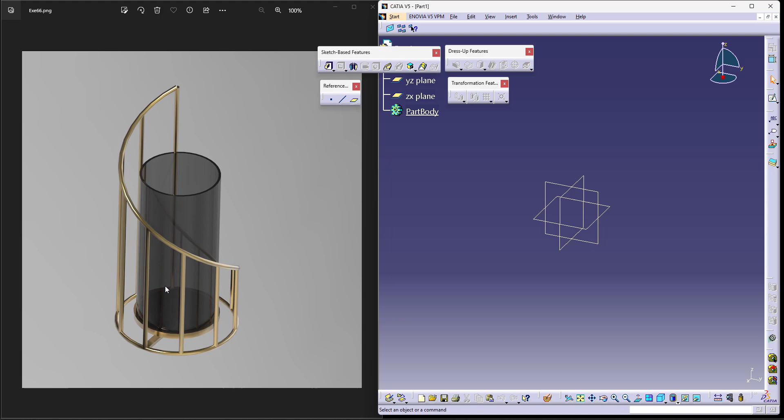So to begin with, let's start with our part design. We already have part. In this one, I'd like to start with the base, make the support first, and then make these, and then join them together. Beginning with that, let us try to take the top view.

Since the base is a circle, I'd like to start with a circle, assuming the dimensions. We have actually measured the dimensions, so I'm just taking it as per those. You can follow, or you can also change the dimensions as per your convenience.

This is a complete cylindrical base. So I need to take a plane, so I can simply start using my rib command. And while taking a plane, I'll make it normal to the curve.

I have a curve, but there is one problem: I don't have a point. So I'd like to create a point by using create a point. Here on the curve, select the curve. You can either give the ratio of the length, or you can actually give it as 1, and say OK.

Now on this, you can actually unhide the point as well, there's no problem. On this, we'll make the sketch. I'm again taking the sketch. This is actually my reference, that is the reason I have unhidden the point, and then I'd be making this circle.

Now the circle is actually towards the bottom. It's not exactly in line with this, because the curve whichever is taken is actually varying. So the base is standing in line with the groove where the base can sit on.

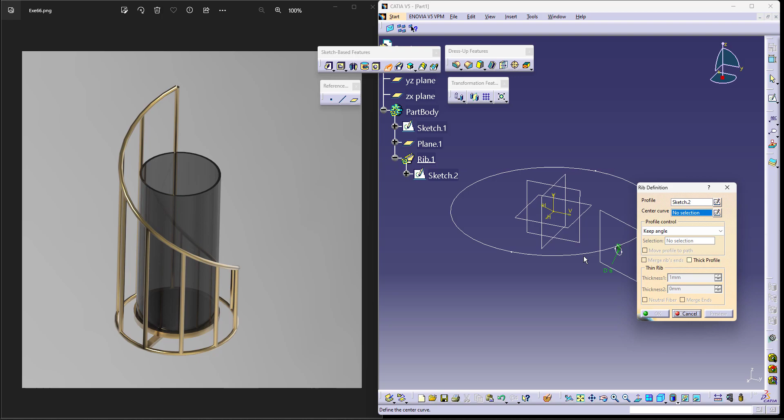Exit. To add material to these types of profiles, you can use rib. Since a uniform cross section is following the complete path, you can directly select this, select the center curve, and say OK. It normally adds the profile.

Now, coming to the base, there is a rectangular portion here and then a circular portion. So let me try to make that rectangular portion as well, considering the right view at the moment.

Now I'd like to make the rectangular portion here, exactly located at the center, which is at a distance of 1 from this side, and 5 from this side, and 4.

Okay, maybe take 5. I need to maintain it symmetrically, that's why I'm trying to take the dimensions. I have not personally measured the dimensions.

Exit the workbench. Now I'd like to add this. I'll be using a pad. To add it, you can add it up to next and onto the other side too.

Now, between this circle and the rectangular bar, there is a very small circle which actually joins these two. So I'd like to take that circle as well, of the same size as the rectangle, considering I'll just coincide the center.

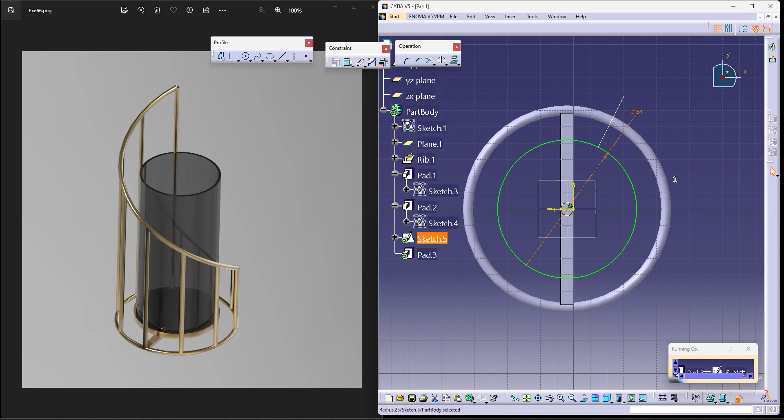Let me take it as 84. This is your circle. Once I exit, I'll add it up to around 6 mm and let it go.

This is your pad. Now, since this is supposed to be hollow, I'd like to use shell and give it up to around 2 mm.

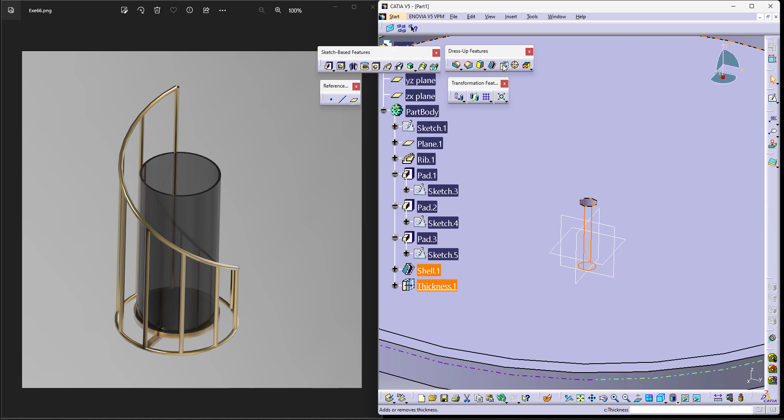But the material also shells here, so I can just add extra material to not shell it there and leave it probably a little bit more, and then leave it this way.

You can also exclude the surfaces in shell, but there is an issue here. It might not create the exclusion perfectly.

Now, the main thing is to create this shape. So let us begin making the shape. I'd like to use my top plane first.

I have 8 of these bars, so I'm going to divide them properly and then work on it. So this is my reference, this is my 0, 0.

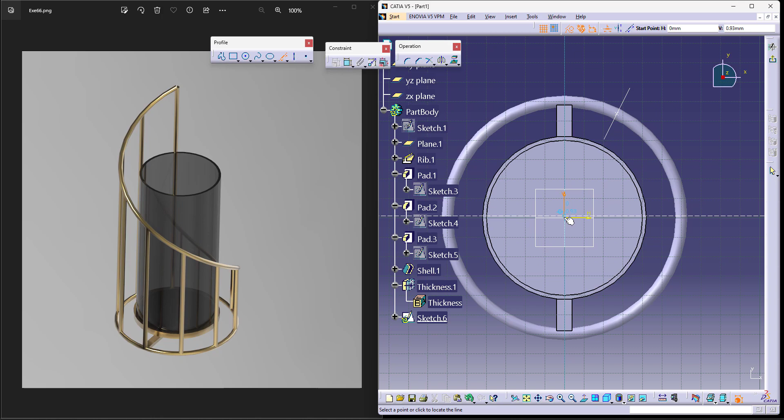Now, on the same plane, I'd like to create a point. The point will be in line with the center circle.

Actually, I'll just unhide the sketch and use this as my reference. It's a little more easier for me to do so.

And then I'd like to create a point exactly at the intersection using my 3D point. This is your 3D point.

Let me hide these so it won't create an issue later. This is my 3D point.

Similarly, I'd like to use a pattern of this, because we require 8 of them.

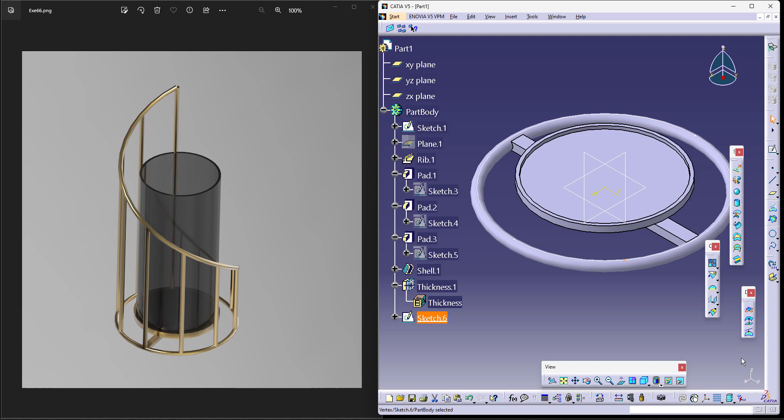So under start in mechanical design, you have wireframe and surface design. Over here, you can actually create a pattern to the points. We can actually use rotation to do so.

I have already selected the sketch. My axis is Z axis. You can see it begins moving it, and since I want it, I'll just give it as such.

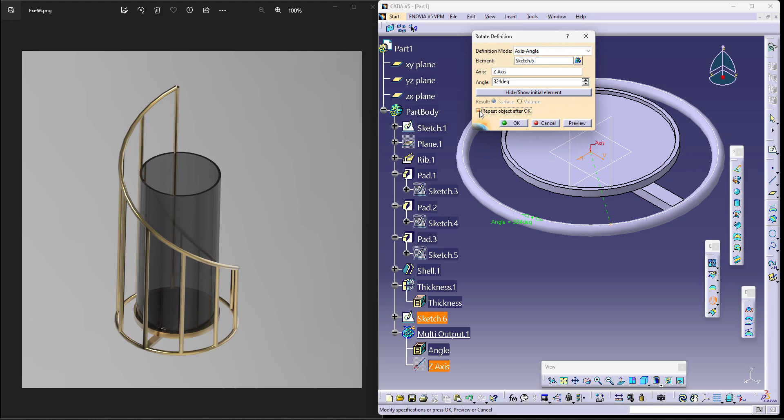I want 8 of them, so I'm using repeat object after OK and giving it 8. You can see the preview if you want, it gives 8.

Actually, I don't want the last one, I'll just delete this. You can see 7 of them now.

Now, in this, we'd work one after the other. We know these are at a certain distance, so let's try to take points at those distances, being in your surfacing module only.

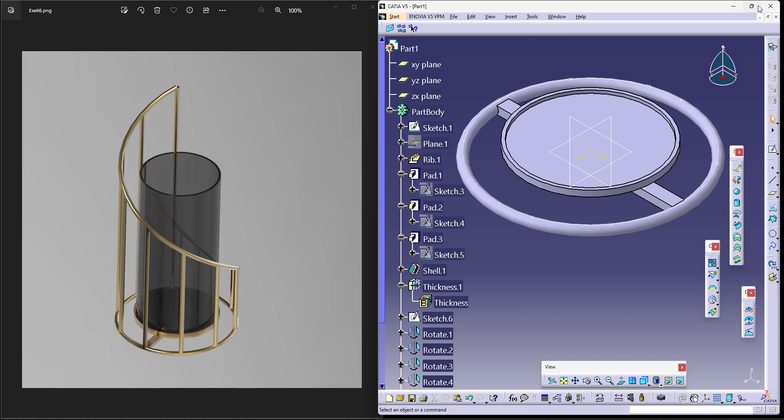Let me try to maximize the screen and then start working. This is your 0, 0 at the moment.

I wanted to move it in the Z direction to around 40. As you can see, if I take the front view, you can see that this is at a distance of 40.

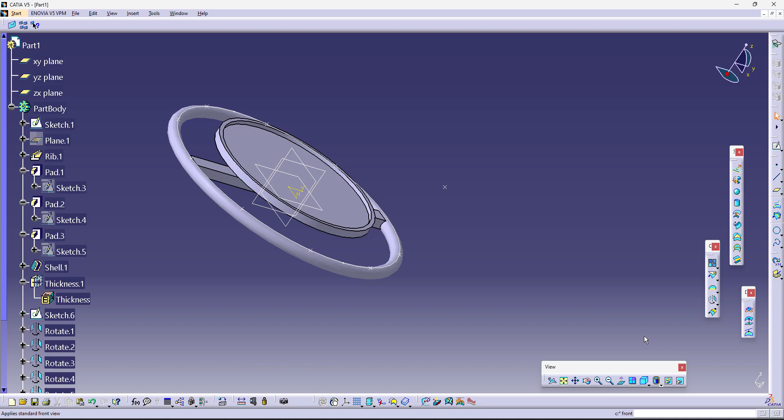Similarly, I have another point as well, assuming this is at a distance of 60. Let me try to take another point.

This is my - I have actually taken for this only. This is my second coordinate, and I want this to be at a distance of 60.

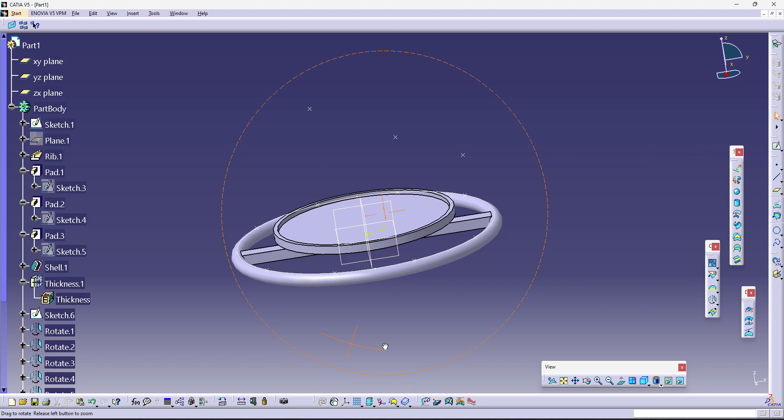Same, let me continue at 80. I'll do it a little bit fast.

You can see it a little slow if you're interested. It's just pretty much the same process.

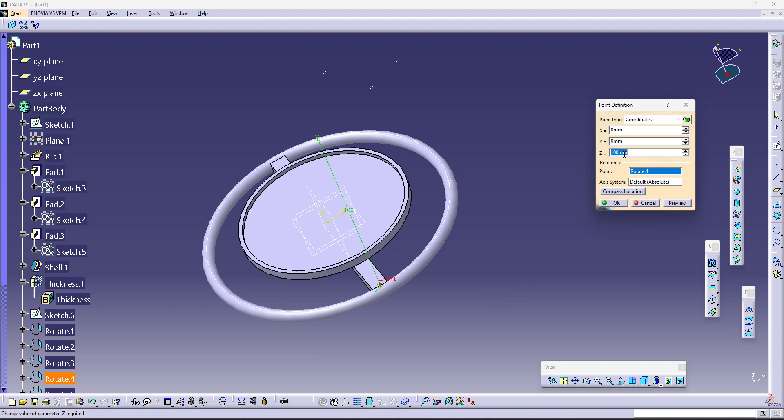This is easier for me to understand what's happening.

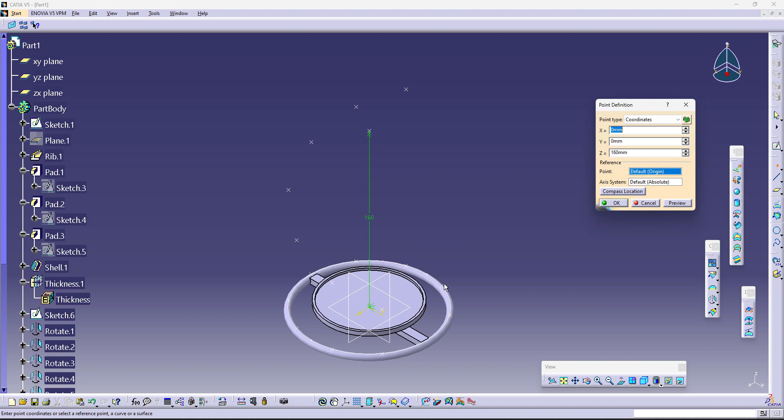The last point is this one, where it goes up to 160. These are my curves. I can actually create a curve, which is pretty easy if you want.

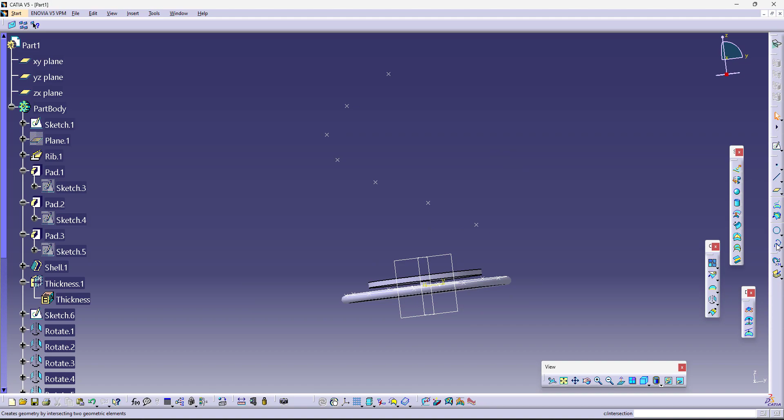But let me try to show you how to create that too. You can use your 3D spline to simply select all the points. It helps you create the curve.

It helps you create a 3D curve again. So when I say OK and go back into your 3D view, you can see how it creates it. Let me continue creating it.

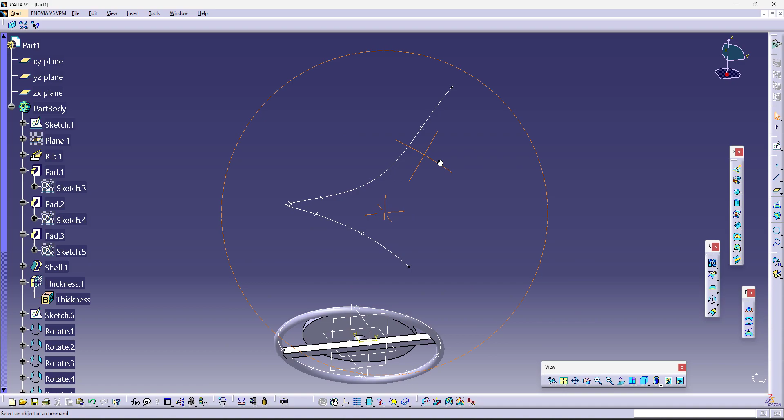Then you can see how it looks like. I can show you with the top view as well. This is your top view.

Now, I'd like to go back to my part design and work on it. Let me try to do that.

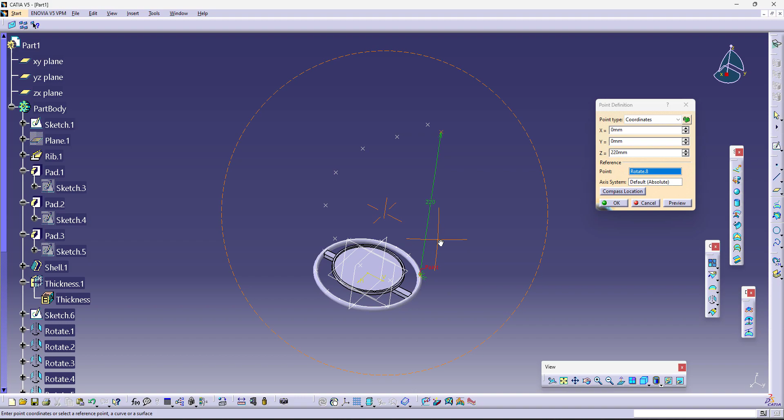Going back into my part design. Now over here, I'd like to add material from here to here first, and then proceed further.

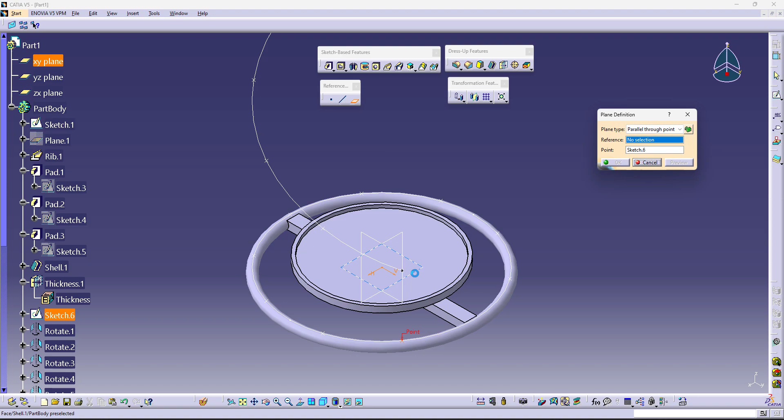So let me try to take a plane parallel through point and in parallel with this. On this, I'd like to make the sketch and start addition of material.

Now here also I'll be using surfacing. It's a little more easier for me to do it that way.

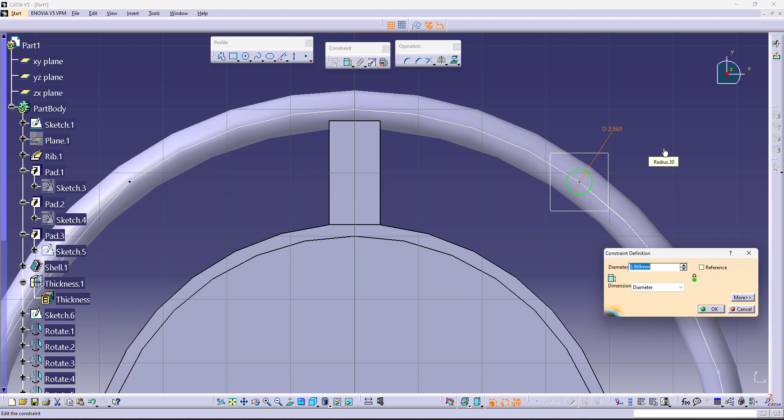Exit. I want to add material to this. Before that, I'll go back into my wireframe and surface design, and I need multiple copies of these as well.

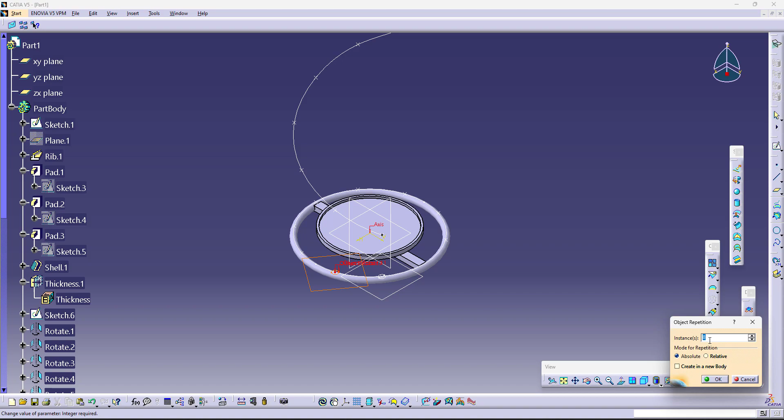So I'll be using multiple copies of these, using similar rotation to what we have done earlier. I'll say repeat after object and I would require 7, and then it creates all the 7.

Here you can go back into your part design, or you can write your command here, which is c:pad, to add the material, which is also easy. There's no issue with that.

Now let's start adding. This is the first one.

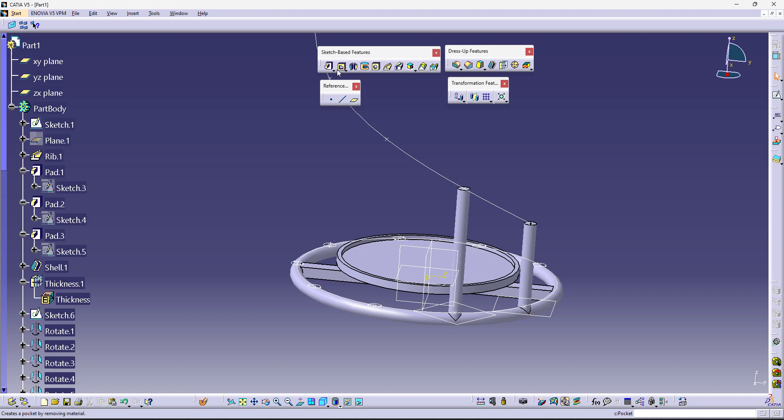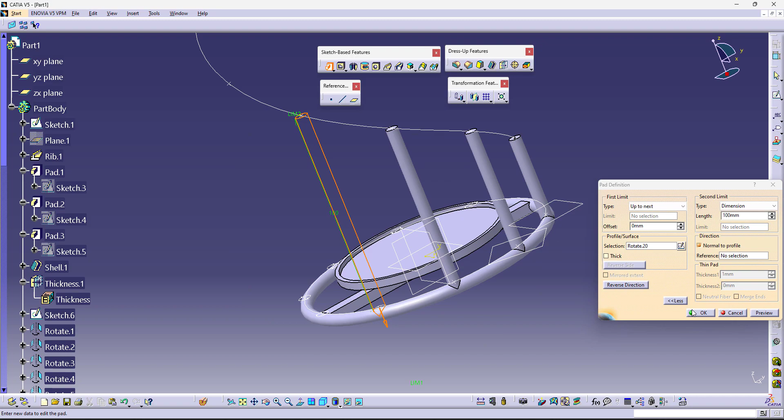There are tricks of doing this in a shortcut manner which you can learn once you come and join us. You can simply use a pattern and change them too.

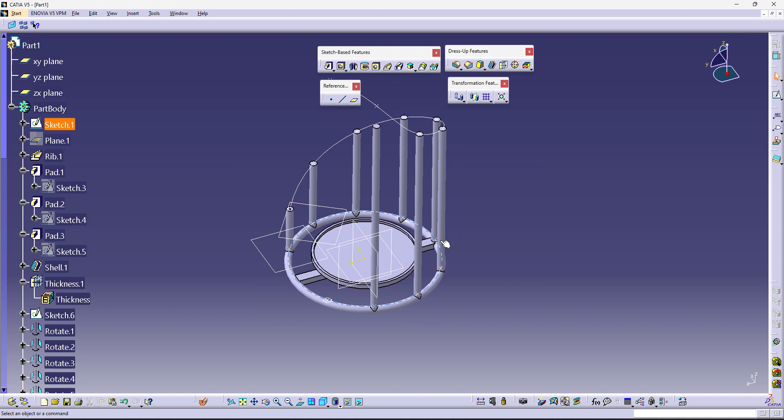Just a second, I think there's some mismatch over here. This is 160, this is supposed to be 180. It went off directly to 200. That's probably why the shape went a little here and there. Great.

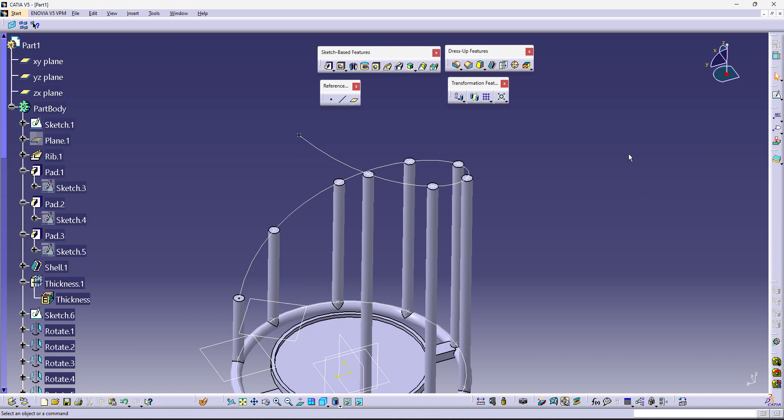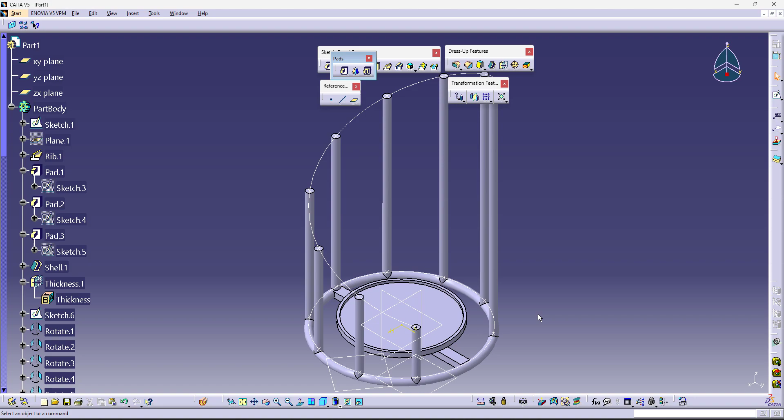These are your frames. As you can see over here, this is the frame. Now, to the frame, you can actually start adding the material as well. So when you're trying to add material, you can directly use a rib command. It's a little easier to do so.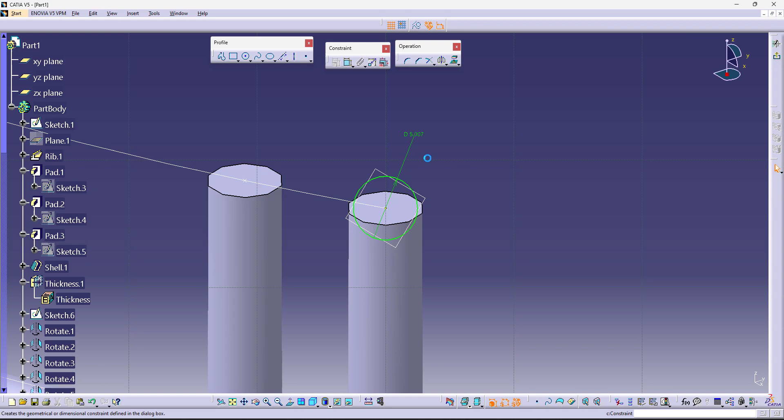On this, I'd like to make a sketch first before using the rib command as usual. I'll be using my references and then making my profile.

Now this should add throughout the profile. You can see it tries to add. This is your actual frame. Now, you can delete the unwanted faces too if you want. As you can see, it helps you cover them. This is your complete frame.

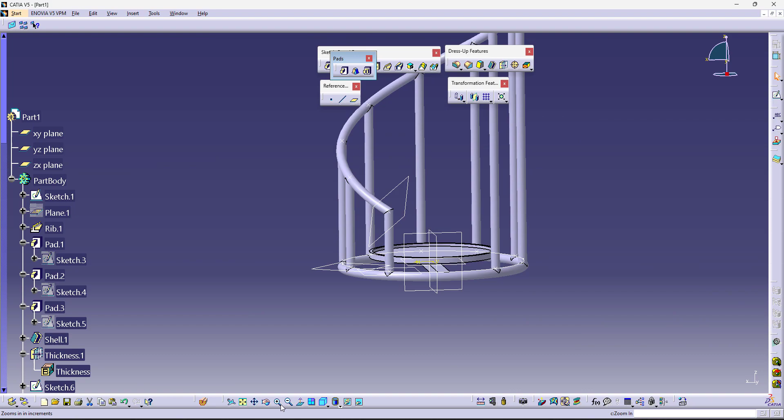Measuring the inner radii of this is actually 40. So let us try to take a new part. Save this first and let's try to take a new part.

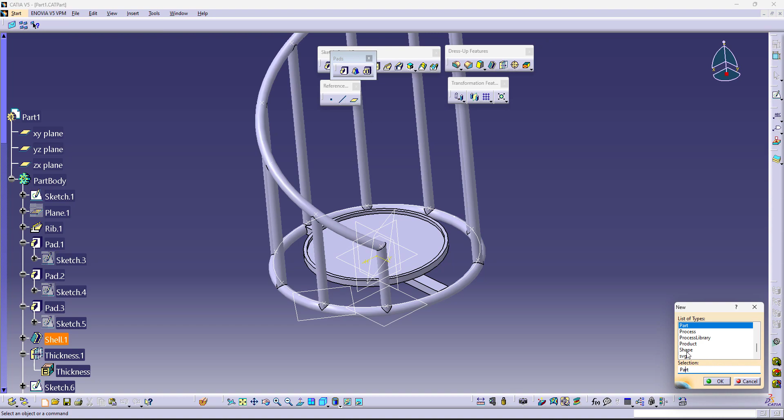In this, let's try to create the actual vase. Vase is again very easy. Now that we have seen the radii is supposed to be 40, that means the diameter is 80. We can take it as 80. We can control the height after going into the model as well. There is no problem with that.

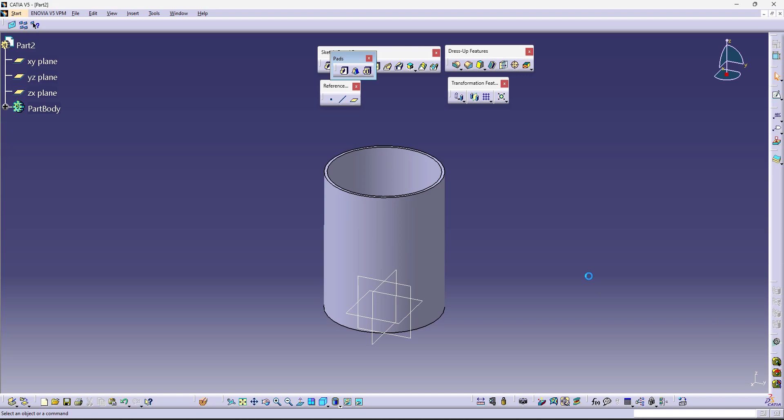You can shell the body too. I'll give 2 mm thickness and shell it. Let us save part 2.

Now, we can start by making the assembly by keeping them two together. Let's try to bring the model here. First, let us try to bring the frame and keep it. As you can see, this is the frame. You have to fix it first since this is the first component.

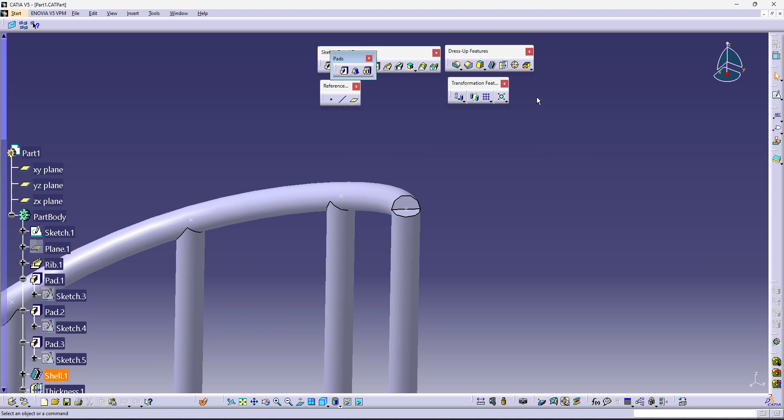You can join these as well using your delete command. If you use the delete face command, it will just create a pretty good shape. You can save it as well. Going back into your product, you can see it gets updated.

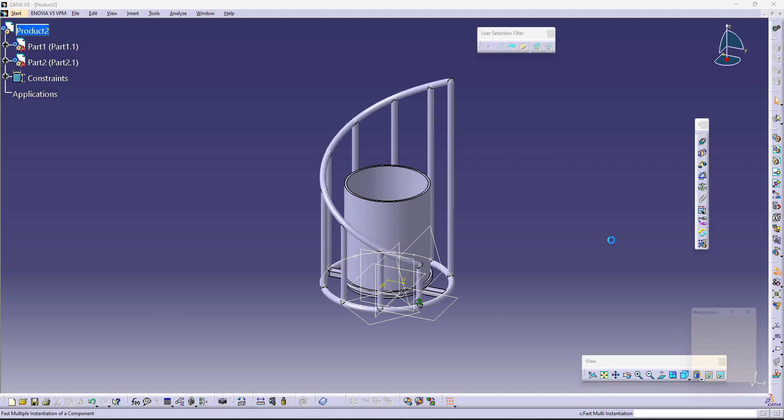Now let us call the second product which has to be placed in between the center here. So let's call that too. Let's move it using our manipulation and then start constraining. After constraining, let us try to see if the height is okay for us. If it's not, then we'll try to change the dimension.

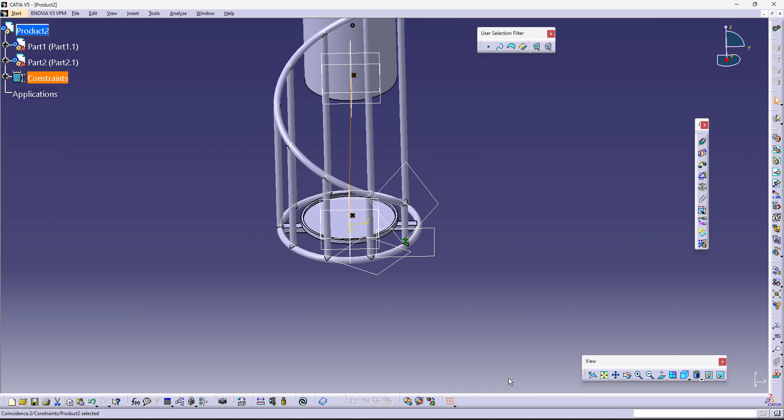This is solely based on the reverse engineering of a physical model we have in front of us.

You can see that the height does not really match with that. Let's try to increase it. Under part, you can get back into your pad and then start increasing the height. Maybe take it up to 150. Maybe 140, that should do.

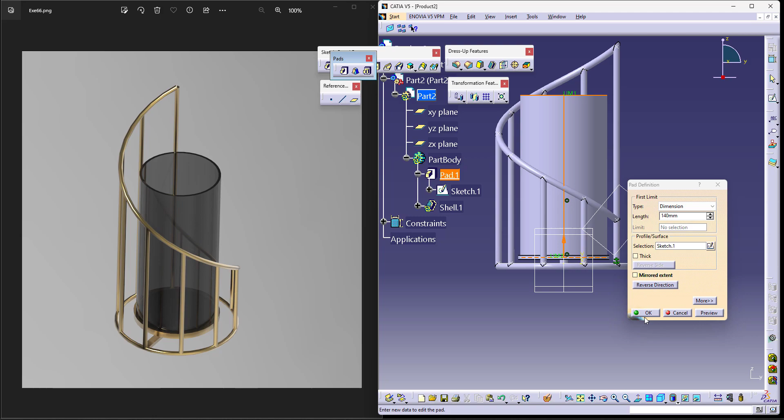Just go back into your isometric view. You can see the model. Then you can get back into your product. This is your assembly of your complete model.

You can of course hide anything you want. For example, I don't want the points, I can simply hide the points as well. I don't want the curves, I can hide the curves as well. Actually, if I don't want anything, I can hide everything too. But I need them, so I'm not going to hide anything at the moment. You can hide your planes if you want.

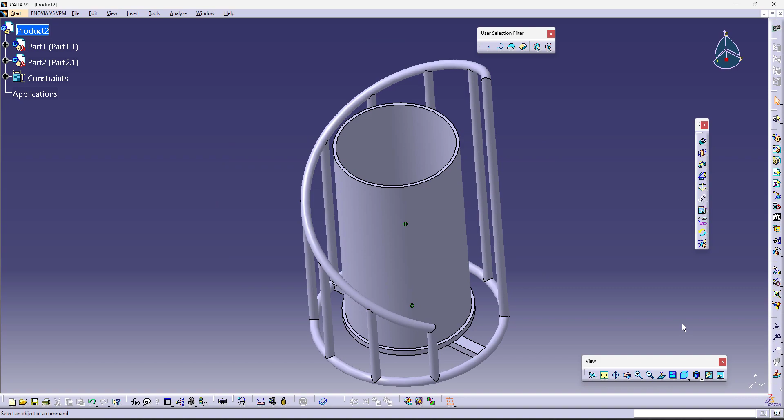This is the assembly of a simple vase which we have seen in the picture. You can also give it a try. We can also try with various models we have right in front of us. Let me know if you have also tried making such a model, or post your results with us.